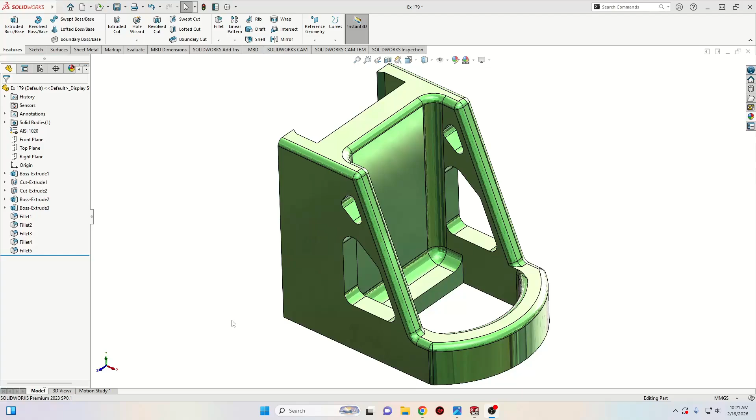And we have here the next drawing. This is it. So let's go ahead and do this.

First let's open a new SolidWorks document, select your part. Now let's make this plain white. And here we'll open a sketch in the top plane.

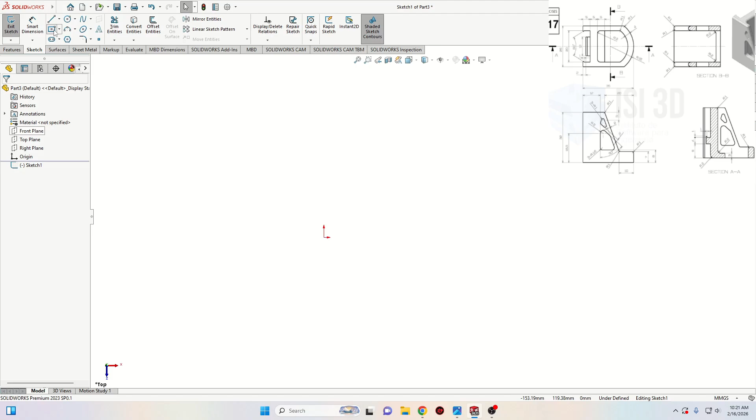Now let's select center rectangle. Let's make a rectangle like this, and now with smart dimension, let's define this. Here will be 35 millimeters. And here will be 26.

Now go to features, use extruded boss base command, and here will be 32. And press here OK.

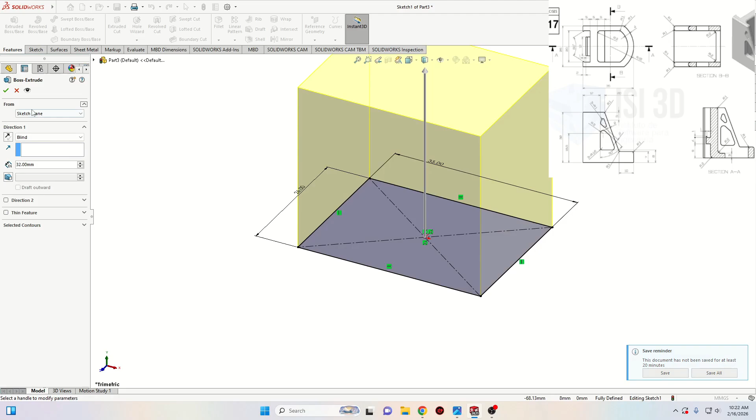Alright, now let's open a sketch on this face. And here let's start with line. We'll start from here and make something like this.

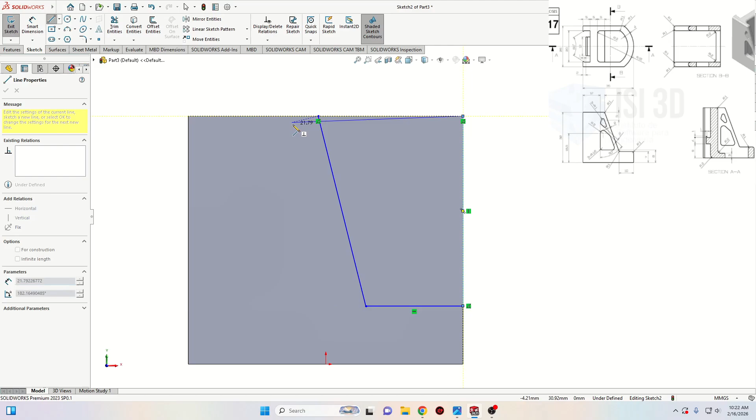Right now with smart dimension, let's define this part first. Here will be 10. From this line to this edge, here will be 7. And now this line will have 20.

Alright, now select line again. Let's make here something like this.

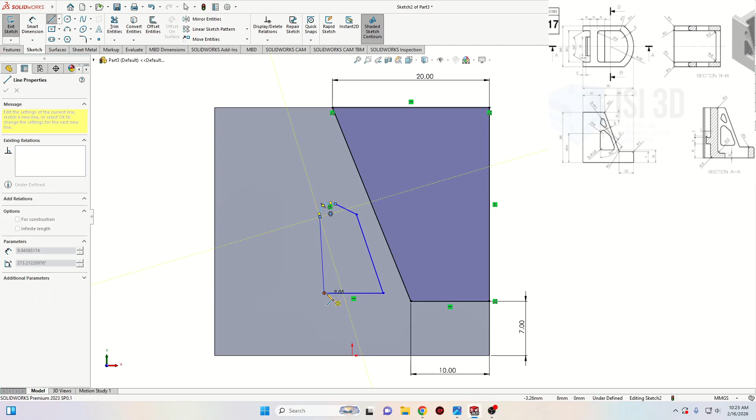Alright, select this line with this one and select here make parallel. And now here should be tangent. Here should also be tangent.

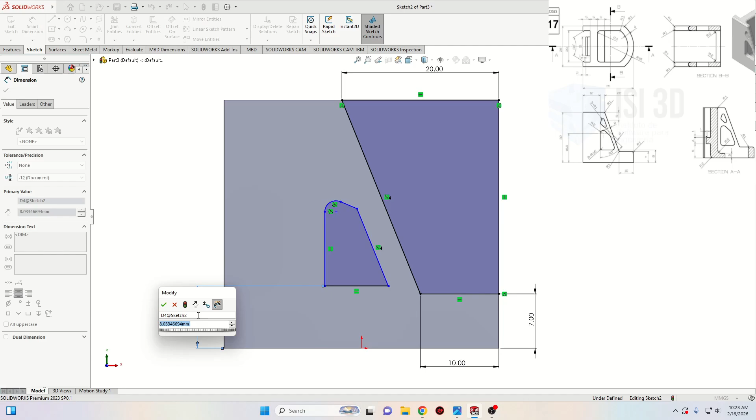Now let's select smart dimension and let's define this. So from this line to this edge, here will be 8. Between these two lines, here will be 2. And now from this center point to this edge, here will be 18.5.

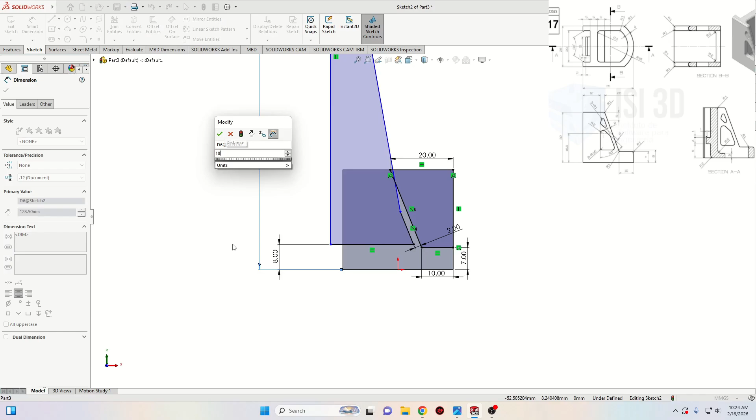18.5. And now the radius for this will be 2 millimeters. From this line to this edge, here will be 12.

Alright, and now let's see. Now we'll have to give an angle from this line to this one, and here will be 50 degrees. That's looking good. Now we'll have to make a small triangle up here. So select line.

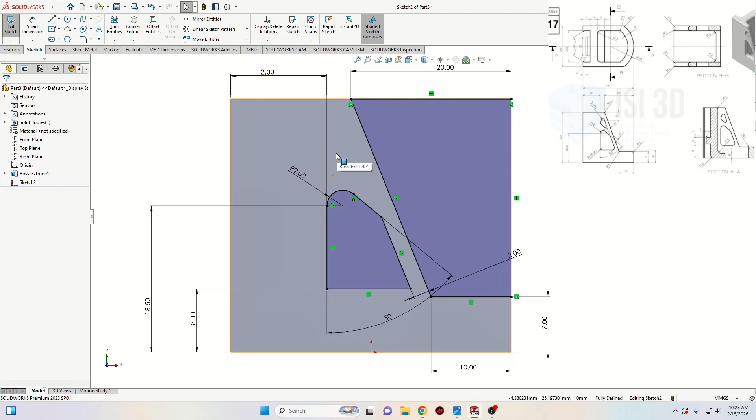Make something like this, then select this line with this one, select here make collinear. Do the same for this other two. Oh, sorry. These two should be parallel.

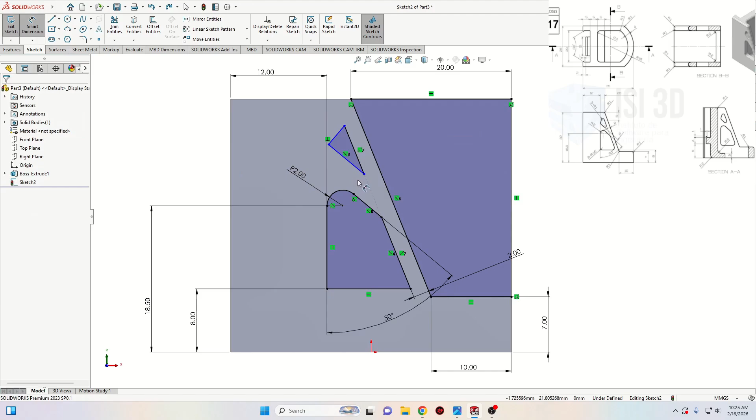Okay. And now with smart dimension, let's give some dimensions. First, between these two lines here will be also 2 millimeters.

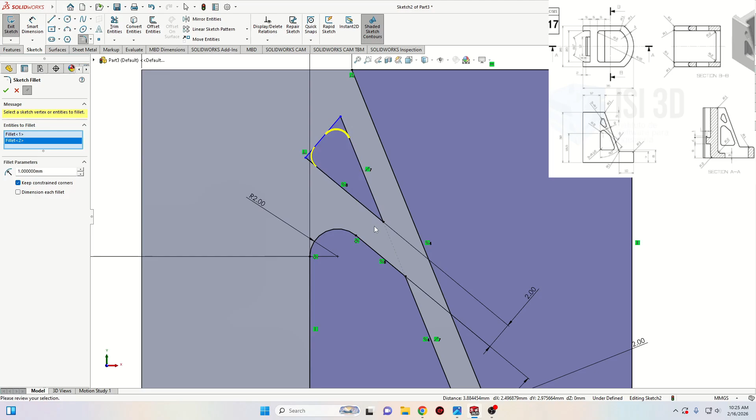And now, let's see. Let's apply the fillets. We have to apply 3 fillets to these corners. So select sketch fillet. The radius will be 1. And let's select all of this. Press OK. Now we'll have to select this point from this arc with this one and select here make vertical.

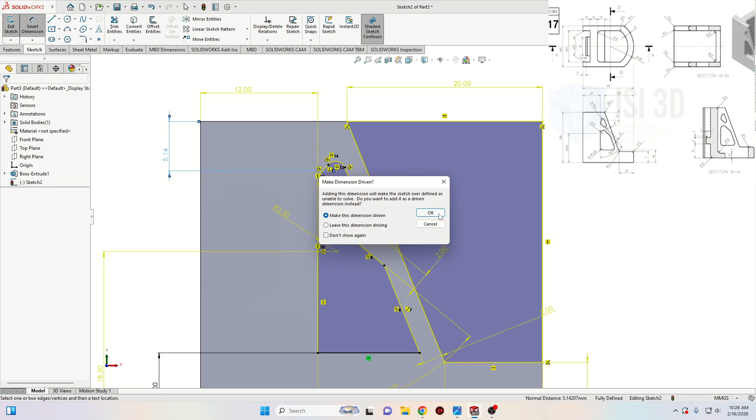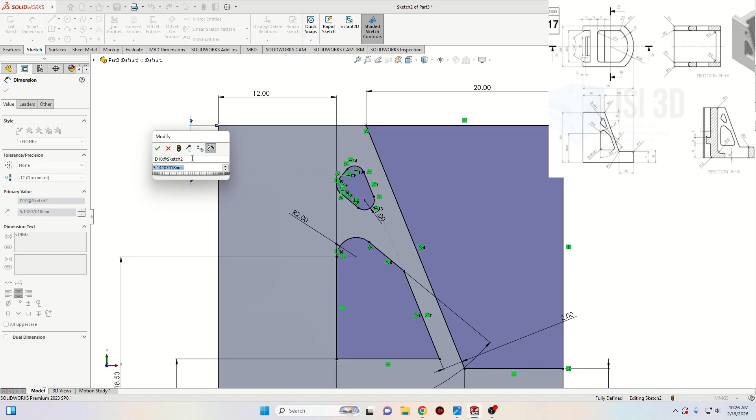And let's see. Between this should be 5. So we'll have to see why it's not working. Let's try to delete these 2 millimeters here, and let's give here 5. Okay, that's better.

And now this is fully defined. Now I'll have to apply some sketch fillet to these corners also. So select sketch fillet again. This time the radius will be 1.5. And we'll have to select this one with this one and this one. Press here OK. And now everything is good.

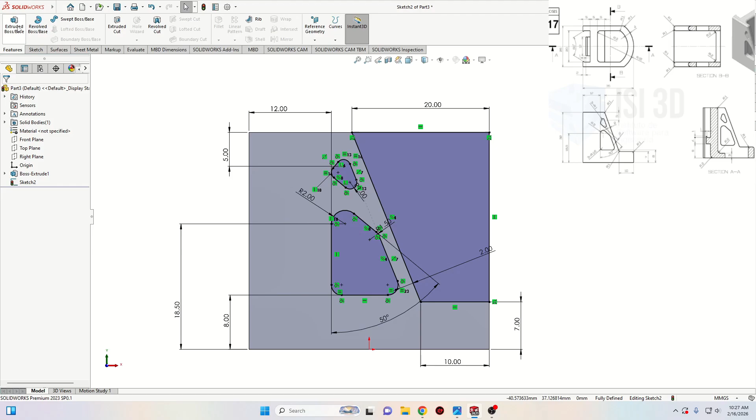Go to features and use Extruded Cut. And here we'll keep through all. Press here OK.

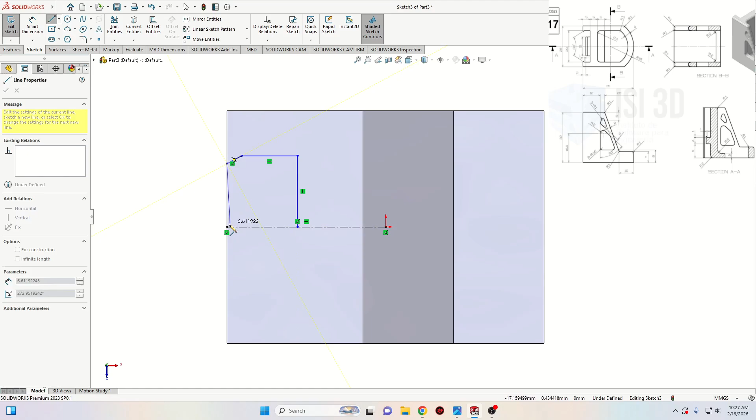That's good. Now select this face and let's open a sketch. And here let's select center line. Let's make here a center line like this. And then select line and let's make the next sketch. Okay, and one here. Now select all of them and select here mirror entities command.

Now with smart dimension, let's define this. Between these two lines, here will be 60 degrees. And now from this line to this one, here will be 20 millimeters. And now from this line to this edge, here will be 5. And this line will have 1 millimeter like this.

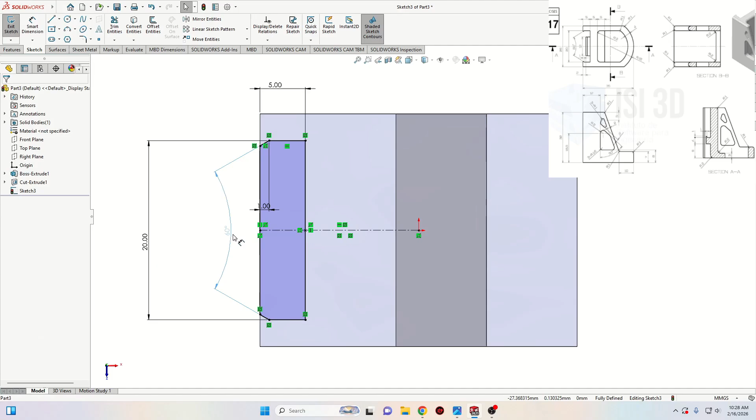Now let's make the next part. Select line and let's do something like this. Select this point with this one and select make vertical. Select this line with this one and select make collinear. Do the same for these two, make collinear.

Now with smart dimension, let's give a dimension from this line to this one. Here should be 5.

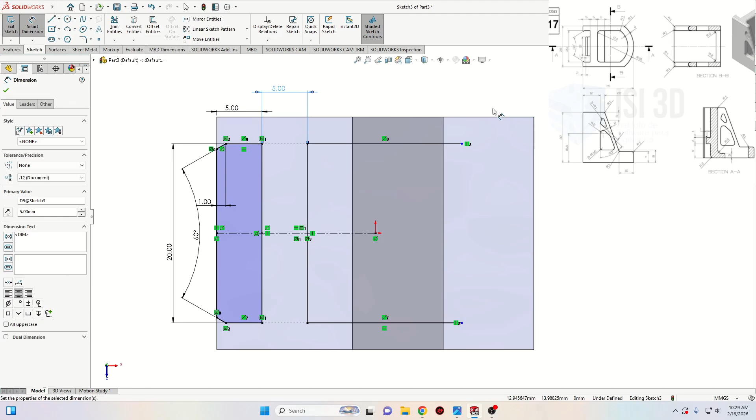Now let's select 3-point arc. Let's make here an arc, and let's make here another one. Select this point from this arc with this one and select make vertical. Select this arc with this edge and select make tangent. Now with smart dimension, let's give a radius for this arc, and here will be 16 millimeters.

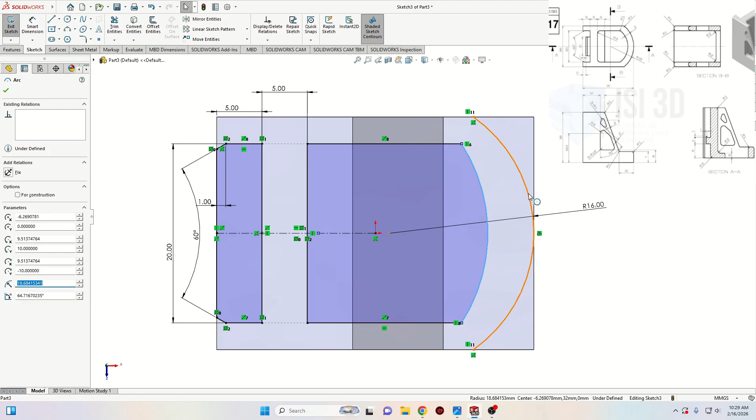Now let's select these two arcs and select make concentric. Now with smart dimension, let's give a dimension between them, and here will be 4 millimeters.

And now select line and let's close this part of the sketch. Right, now everything should be good.

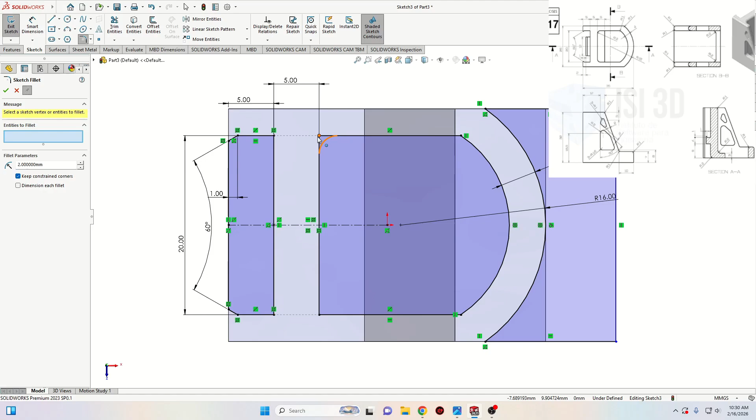Now what we have to do is apply a sketch fillet, or we can make it after with fillet, but let's do it now. The radius will be 2 millimeters. Let's select these two corners and press OK.

Now let's go to features, use Extruded Cut, and here we'll keep through all and press OK. Now this is looking better.

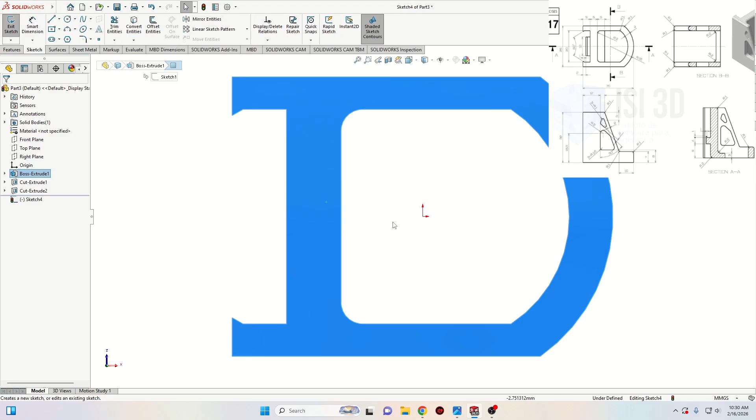Now the next thing we'll have to do is select this face and open a sketch. Here let's select, with Control pressed from the keyboard, this edge with this one, and these two. Now let's select the Convert Entities command.

Now we'll select line and let's make here a line. Make it horizontal. Okay, so horizontal.

Delete this coincident there because we need to give a dimension to it. So select smart dimension, and from this line to this one, here will be 5. Now with trim, this command, let's cut these extra parts of the line.

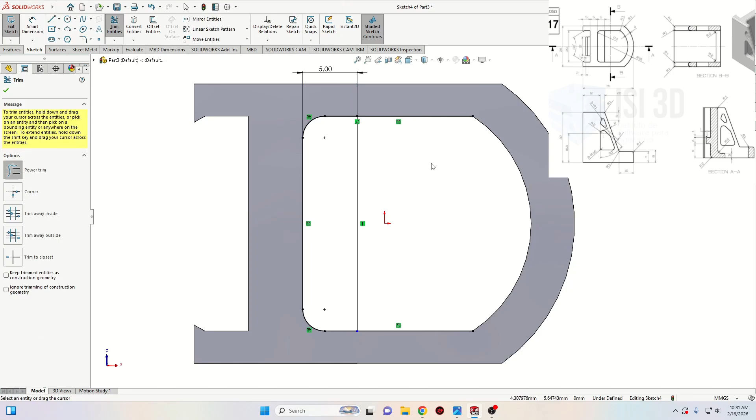Now go to features, use Extruded Boss Base command, and here we'll keep blind, reverse the direction, and the depth will be 3 millimeters. Just like this. Press OK.

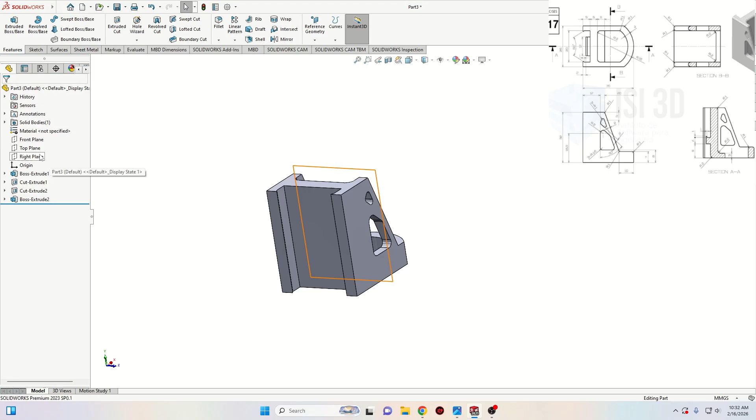And now let's open a new sketch, in the right plane. And let's go to display style and select hidden lines visible.

And now select line, and let's make here the next sketch. We'll start like this.

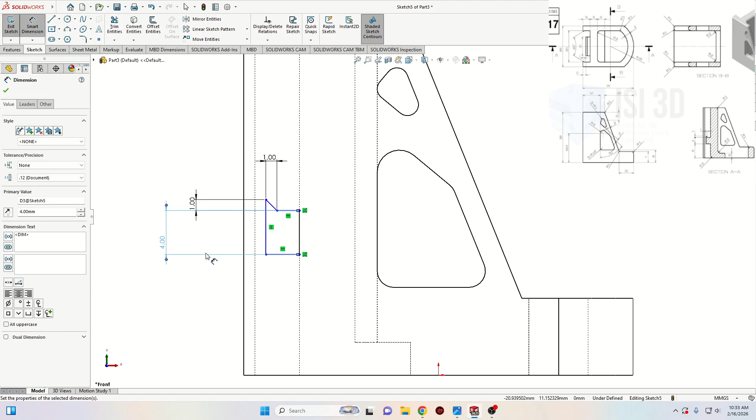Now with smart dimension, let's define this. Let's see, first, here will be 1. Like this will be also 1. And now this one will have 4 millimeters. And from this line to this edge here will be 9. And from this line to this edge here will be 2.

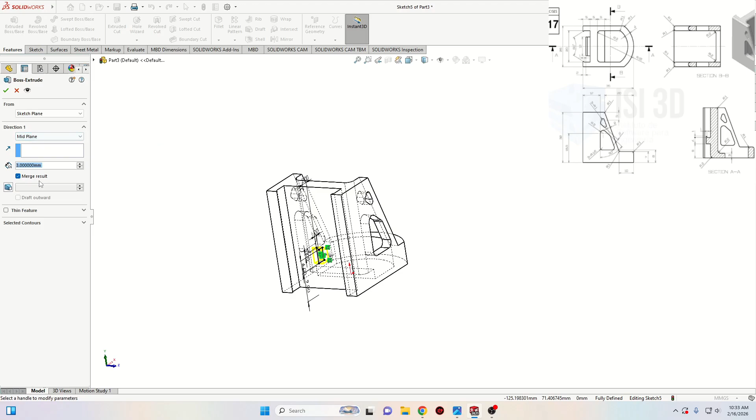Go to features, use Extruded Boss Base command, and here instead of blind we're gonna select mid plane, and the dimension will be 12. Press OK. Now let's go back to hidden lines visible and select this one, shaded with edges.

Alright, now this is looking good, it's almost finished. What we'll have to do next is to apply some fillets.

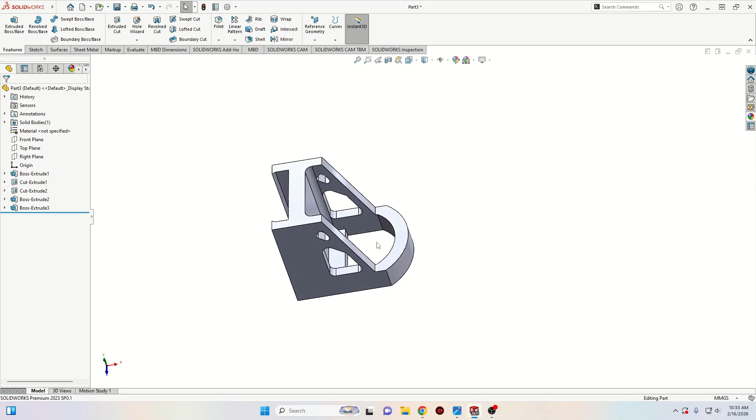So let's select fillet. Let's make radius 2 millimeters first and select this edge here. And I think this is it with radius 2.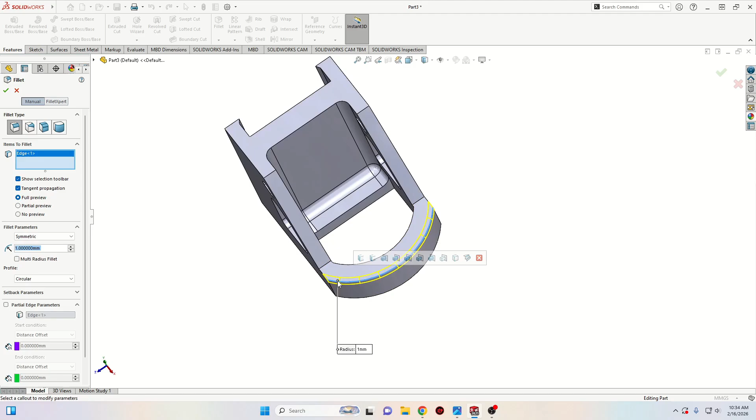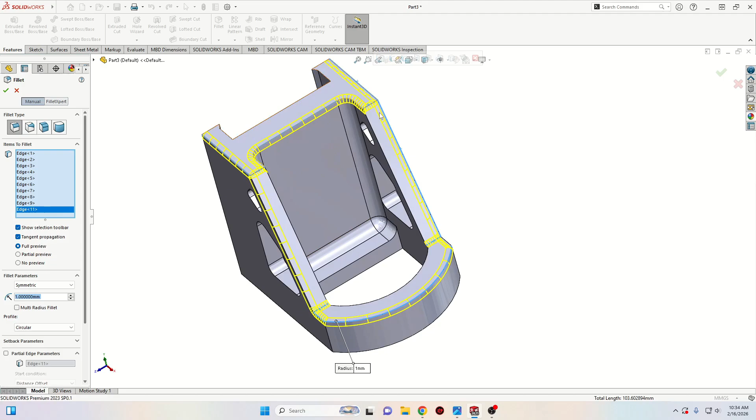Now let's press OK, and let's make the next fillet with radius 1. Radius 1, we'll have to select this edge. Alright, let's select only this for now, and let's press OK.

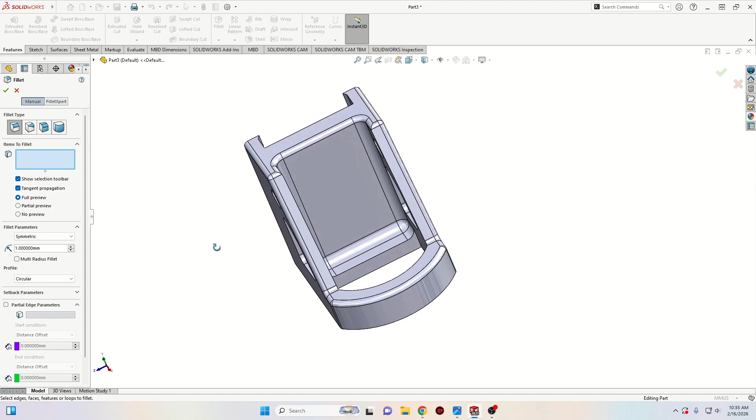And now let's make another fillet with the same radius 1, and let's select the next edges. Let's press OK, and let's make one more with the same radius 1.

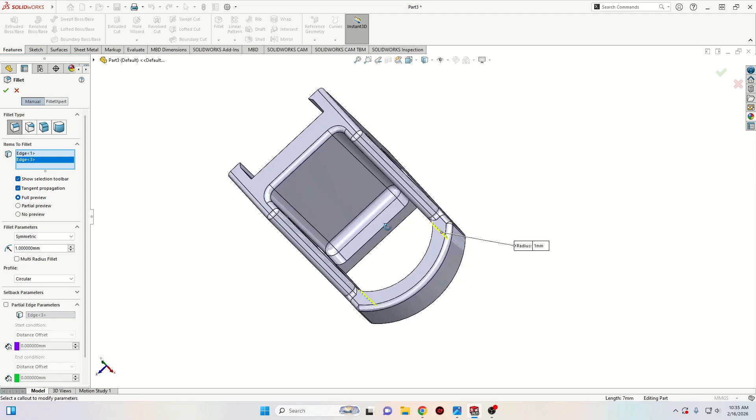And this one is not working right now, so we'll have to make one more. Okay, and now it's better. Right, I think that these are all the fillets.

So this was the part for today, this was the tutorial. Thank you for watching, and I hope to see you in the next one.